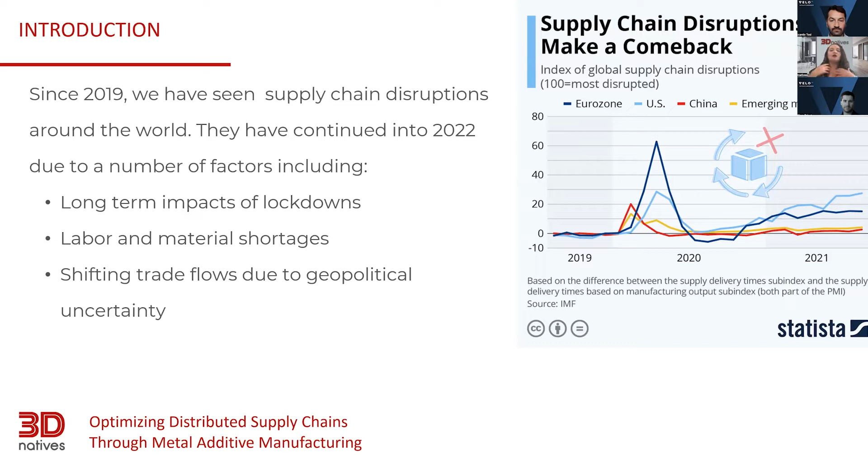Before we go into the detail, just a little bit around us. Velo3D, born out of the US about 8 years ago. We went public at the end of last year, and part of why myself and Ricky are here is expanding the knowledge base and our customer base into Europe. It is a metal AM solution, additive solution, and it's all around the focus around delivering complex, high-value metal parts without design or quality compromise.

As we say, we're a global company. On one side, we support customers directly, and on the other side, we have a large CM network to support our customers.

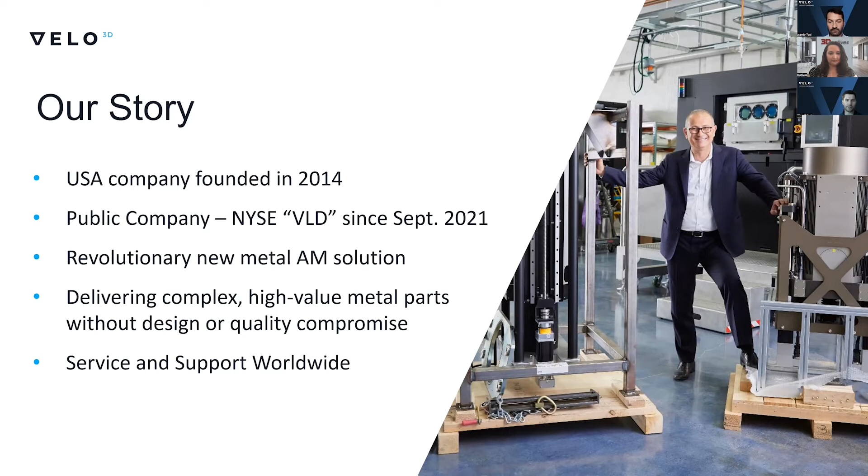In terms of who we serve and some interesting examples in supply chain, the first is a company called Launcher, one of our space companies, who had a quick necessity for lead time. They had a fast development process and needed large Ti 6.4 tanks. The whole reason they used additive was to reduce initial lead time, along with inherent technical capabilities we offer that you can't get with legacy techniques, like our support-free technology.

Within the energy market, we're seeing that the focus on castings and legacy castings is being monopolized. So big players in the energy industry are looking elsewhere for alternative manufacturing techniques to reduce lead time and ultimately dual source their supply chain, which is a very interesting conversation.

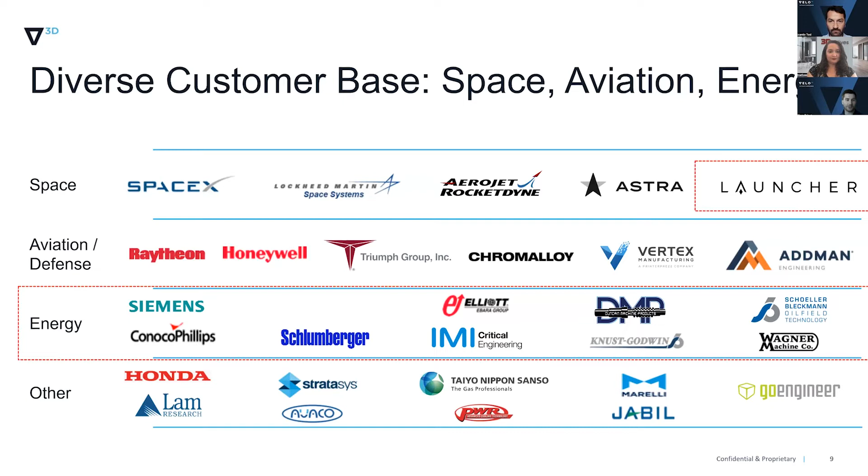In terms of what we do and examples where we've integrated into legacy supply chains, these are around parts optimized for controlled flow and heat transfer. Large parts like this Inconel 718 impeller, a typical oil and gas or energy part you might see made by legacy casting, can now be made with additive, with no tooling cost and no upfront minimum order quantity. You can make one off, ten off, a hundred off, as needed, reducing lead time and tooling cost, with almost a just-in-time manufacturing operation close to the site where you'd use this.

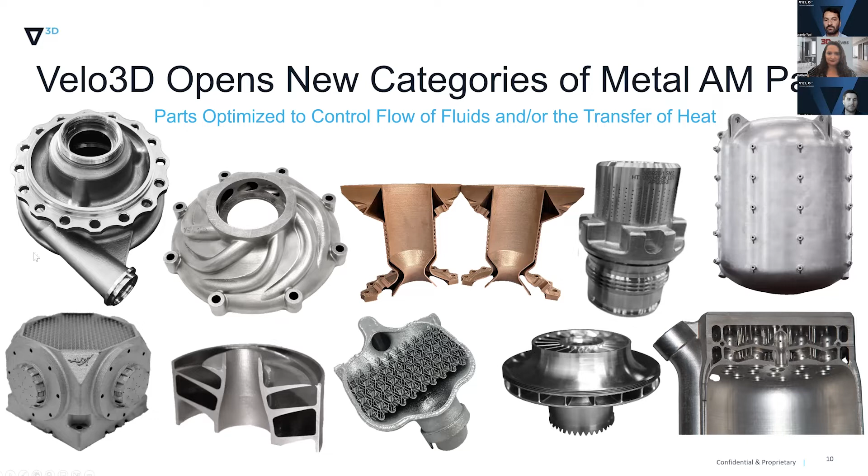Typically some oil and gas OEMs will want to build close to their oil and gas pipeline. We can talk a little later about some of these case studies, and I believe Ricardo will be going into a specific oil and gas case study.

The interesting thing about supply chains, especially legacy ones, is that things are qualified, industrialized, and standardized, and this is the way it's been done for a large number of years. This is a hurdle to overcome as we open up new additive supply chains. On one side you have industry level standardization, like NACE and MMPDS, which you need to understand and qualify. On the other side is manufacturer level standardization, which is something we offer as Velo3D.

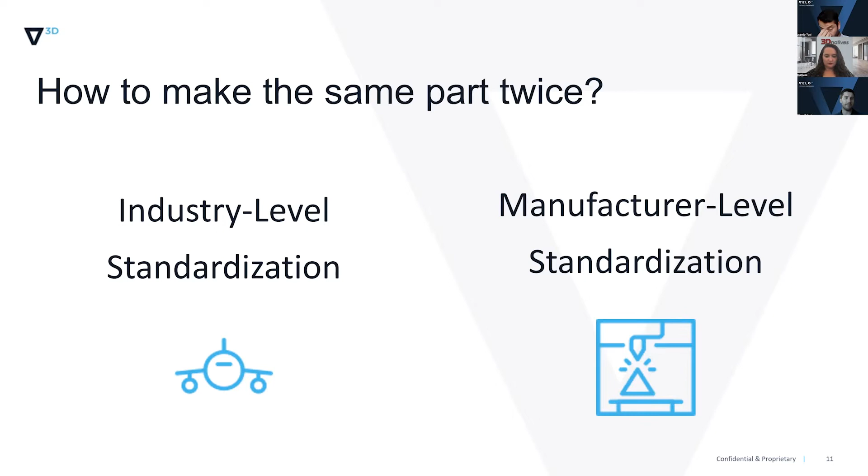It's really about understanding as a supply chain what you need to enter these supply chains, so it's about part quality, part qualification, and making sure we can deliver the right standards to these bodies. As we focus on fleet level standardization, with more of a global presence, it's around reducing the barrier for people to qualify parts and open up that new supply chain.

On one end you have an open source platform, where some OEMs give the end supplier or end user the right to change parameters to their needs. On the other end you have a lockdown system. Velo3D sits in the middle to allow flexibility for design, and this allows you to assign parameters at the front end of your additive process, reducing initial lead time and design time.

All of this allows for a flexible supply chain for either in-house or what we call contract manufacturer sourced manufacturing. The outcome is ultimately a standardized and validated material property set at the fleet level, which can be used to support your distribution of parts and supply.

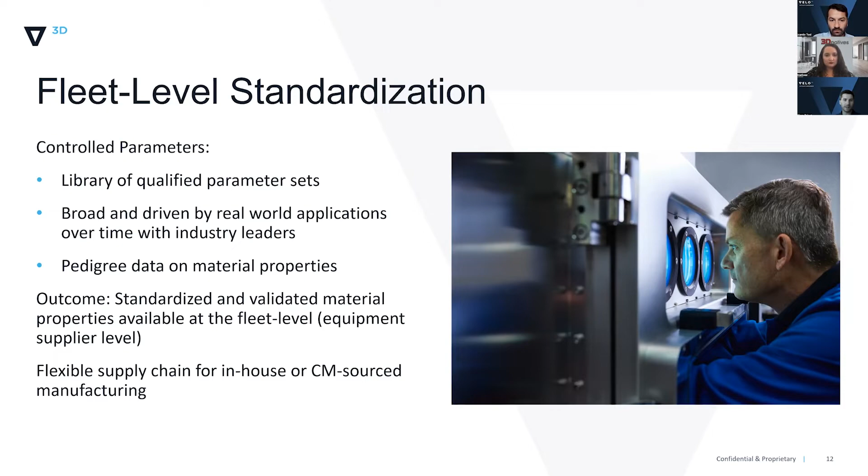We touched a little on it, but before Ricky goes through the various case studies, I'll explain what we do and how we integrate into supply chains. Ultimately we sit in the supply chain as a process and technology company. We offer the hardware, the front end flow software, and the Assure software. The focus is on standardization, design freedom, repeatability, and quality, so we can compete against robust supply chains and produce a global footprint that customers can produce parts on.

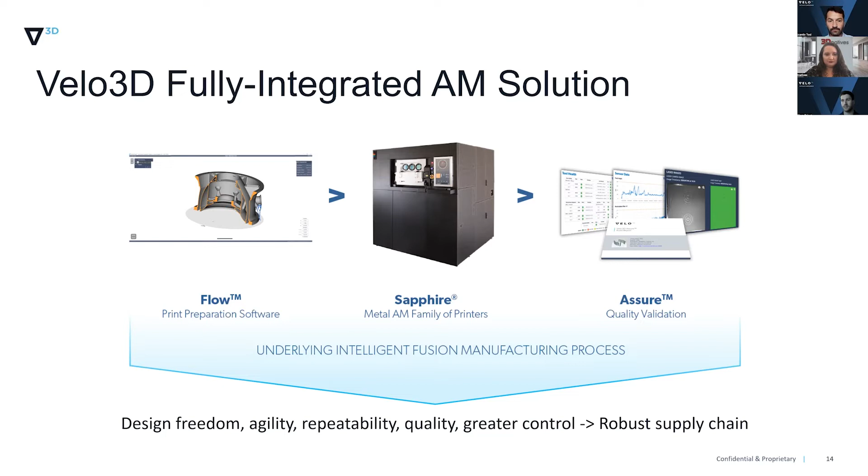On the front end is the print preparation software, which produces what we call a golden print file. For me, a robust supply chain starts here at the data level. This is what we're offering at the front end, effectively locking down the part for ultimate qualification as we move through the process before delivering to the customer.

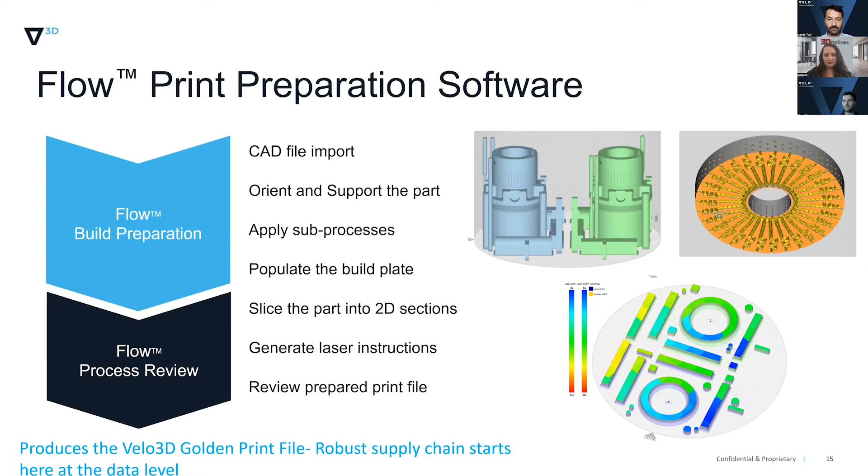It then goes on to the hardware level, and many of you might have already seen our family of printers. What's very interesting is that the hardware we've developed has been driven directly by the voice of the customer requirements from supply chain issues. Where customers need a very flexible supply chain, specific geometries, and specific validation of parameters, this is where we've developed our technology, and we will continue on that roadmap.

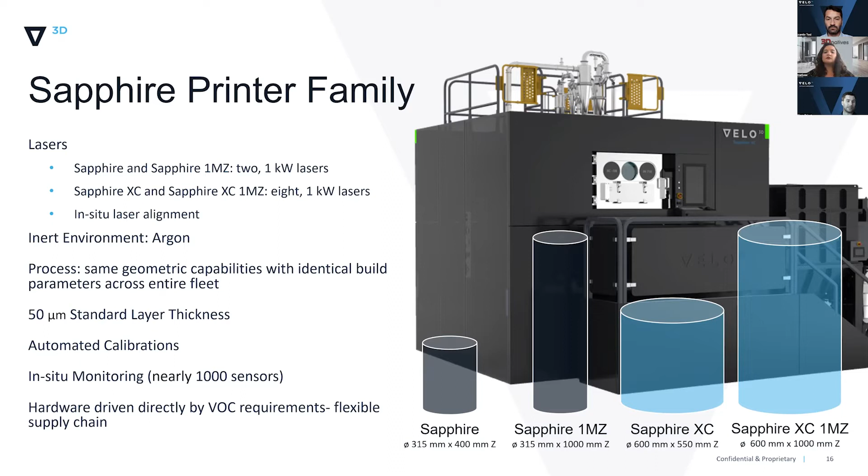Something which is a barrier to entry on many a new supply chain is the quality assurance and validation of a part. Essentially what we've done is ensure that we can meet that standard, or even produce a result which allows us to get over that barrier for validation. So effectively in-process monitoring, automatic build reporting, automatic calibration—something that against legacy systems you might see is even better for qualification, and ultimately gives the user who's trying to build a global supply chain that confidence moving forward.

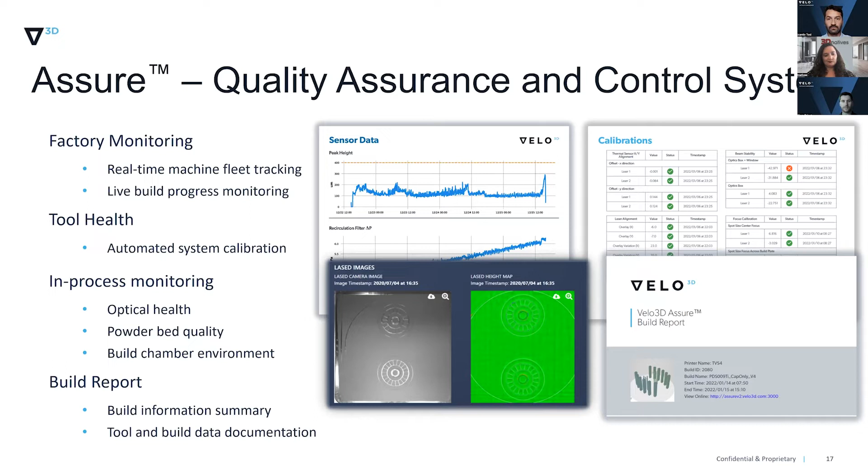What this culminates in is essentially a single source, standardized, robust supply chain option for OEMs. Ricky will talk about the golden print file a little later, but essentially this allows you to negate some of these supply chain challenges. You don't have to rely on legacy manufacturing techniques, and you can ultimately dual source globally. There's no reliance on tooling or legacy supply chains with long lead times—you can take those 50 weeks or 20 weeks down to a couple of weeks. So really, this is the benefit of the validated system.

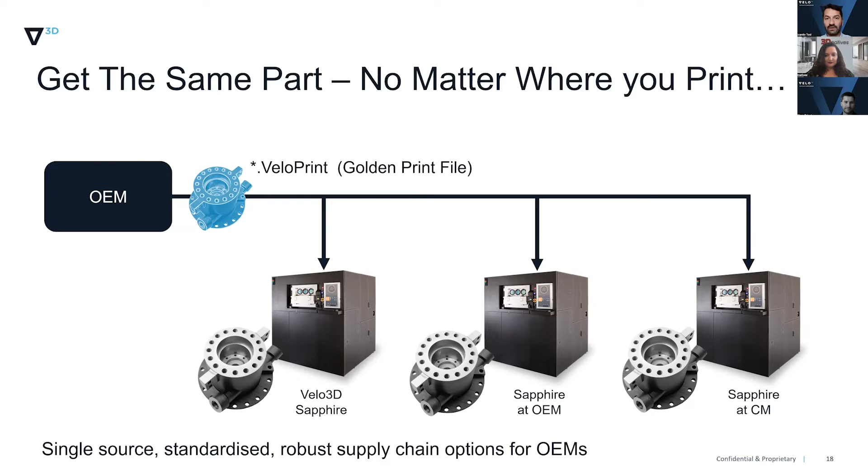Thank you, Will, and thank you Madeline for the introduction. So after getting through the main topic, I would like to dig a little bit more into the details, like the challenges that we currently have in the supply chain to qualify components, and how the market is currently addressing these issues. Will is driving the slides, so thank you, Will—I'll shout to you when it's needed.

Getting back to the topic, we have several challenges these days in the global supply chain around how to qualify parts and how to address manufacturing with additive manufacturing. At Velo3D, we're working with several manufacturers, contract manufacturers, and end users who are making parts, just to understand how we can improve the global supply chain and how we can manufacture parts through additive manufacturing. But it's not just about how to manufacture the part—it's how we make them consistent, how we certify the part, how we get the right certification, and address the right level of quality across the whole process chain.

Today we're covering an example of a valve—a drag valve specifically. I don't know if you're experienced with valves, but this is definitely a special one. We can see this cylinder, which is like a plunge valve in the middle, moving up and down. There's a flow going through it—it can be a liquid or a gas depending on the application. It covers different fields like fossil, nuclear, oil and gas. So by moving this plunge up and down, you can control the flow.

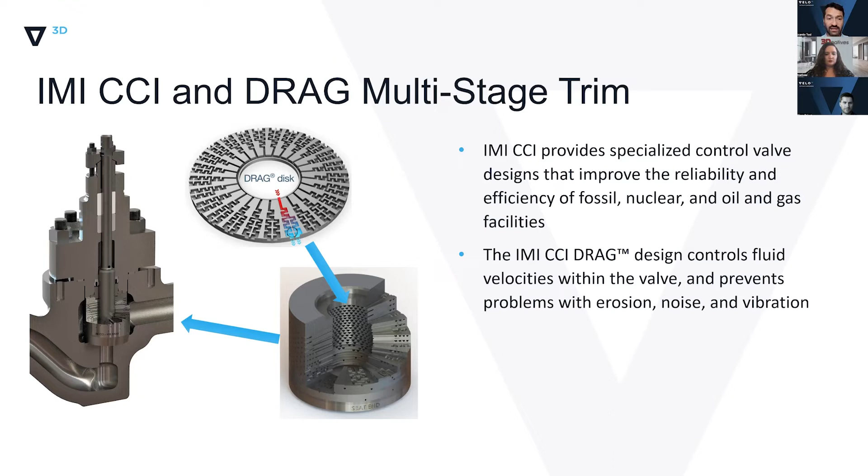If we go to the next slide, we see that this valve is conventionally made with discs assembled together, with some holes and different geometries placed just to make a pattern for these discs. When they get assembled and stuck together, they're conventionally brazed. So it's kind of a long process to make these valves. But on top of this, we can say that...

every valve has a different geometry depending on the application, so they can be very much customized. Most of the time we don't see the same valve twice, so there's a request for different designs. So here the matter is having a quick response to the customer and the design they have, and this can be called the big manufacturing challenge of parts, because we have different designs and different requests.

So it's very difficult to stay behind the request of the customer.

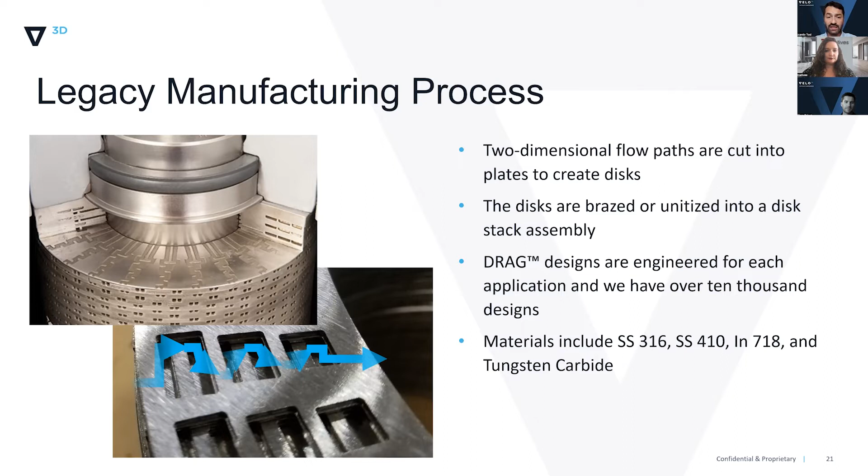You can really refine your channels in the way that you are willing to use the valve itself, and on top, you can really optimize the shape of the holes. So it's a very new approach, and this can be done in one single step, while also optimizing the weight and the design.

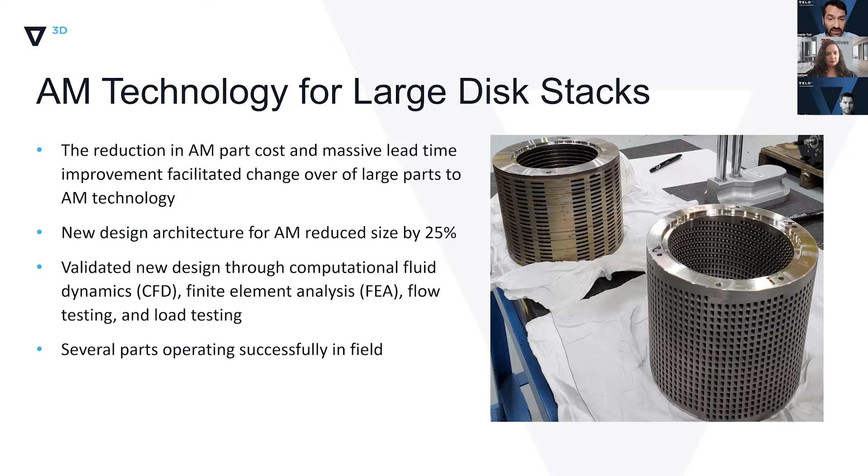If we go to the next slides, we can understand the way they're trying to manufacture, and especially to address the challenges to make this complex part in additive manufacturing.

As we are all aware, there are some certifications that need to be addressed to make the part usable during manufacturing. So there are some standards that can be driven in different fields.

For example, we can see aerospace. Aerospace has used the same material, or almost the same material, for the past few decades. So it's very challenging to bring new applications and new manufacturing strategies to the field.

What can you really do to address new metals, new parts in the supply chain using additive manufacturing? There are a lot of challenges.

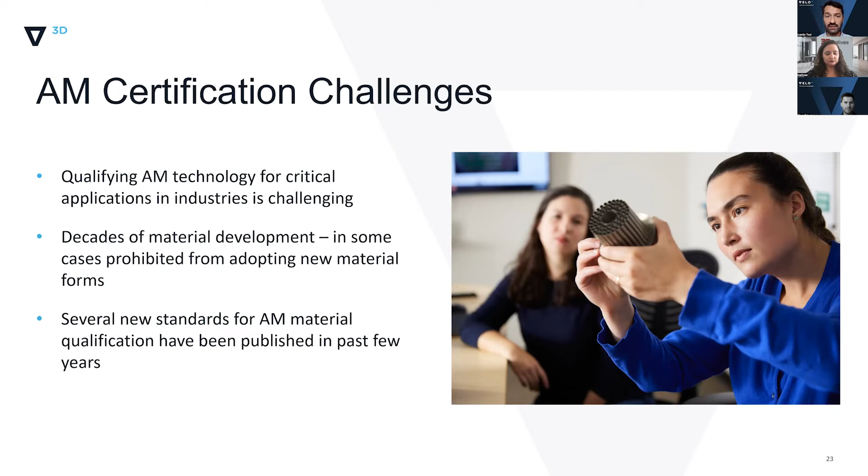So what we've done, we can see in the next slide, is what we tried to do with the IMI CCI to address these challenges.

So we followed a path to try to develop this new valve using additive manufacturing, but not just making it itself - trying to address and certify the component just to get it allowed to be mounted, to be in service and working.

If we go to the next slide, we see some fundamental steps that we follow during the qualification of the parts. There is a full integrated chain that needs to be addressed, and it's quite complicated because it's not just the part, not just the end user - it's all of them together, including the qualification you need to address to get the part suitable to be placed in the field.

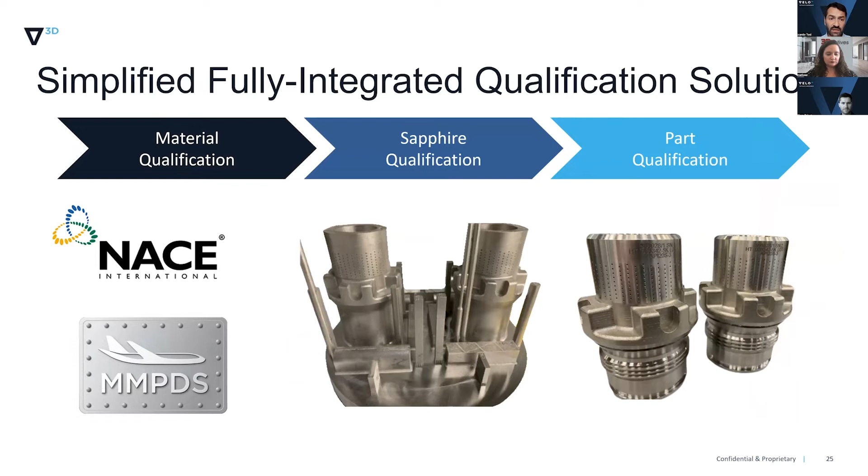So if we go to the first step, next slide, we can see that in this case it's oil and gas, where the part is going to get located.

There are a few certifications like NACE, which is about corrosion. There are some standards that have been placed in the past, but not all of them address additive manufacturing. So we still have a lot of gaps here, both in oil and gas and in other fields.

So what we've done in order to succeed in certifying these components - we did a lot of tests, mechanical tests, lots of prints, and a lot of post-processes that allow us to prove the quality of our component itself.

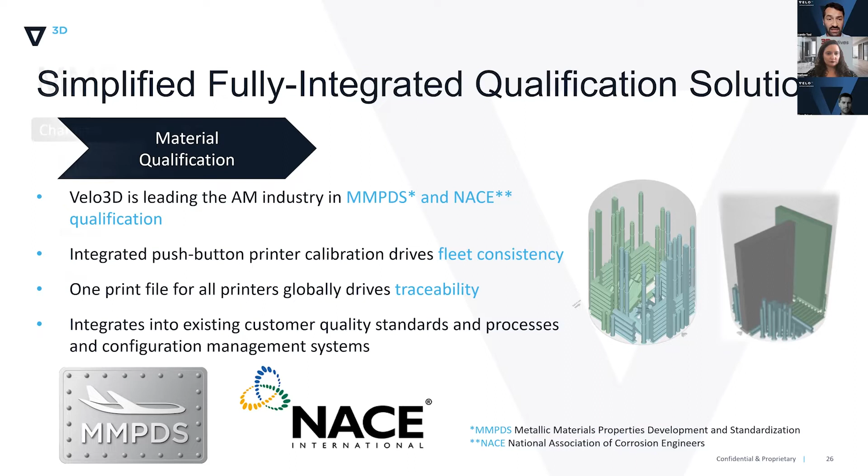If we see the next slide, we can also notice there's a various number of tests that we've done on our builds just to get the first data to really prove that the part itself can be good enough to be certified - from mechanical tests that happened before, to the characterization that happened afterwards.

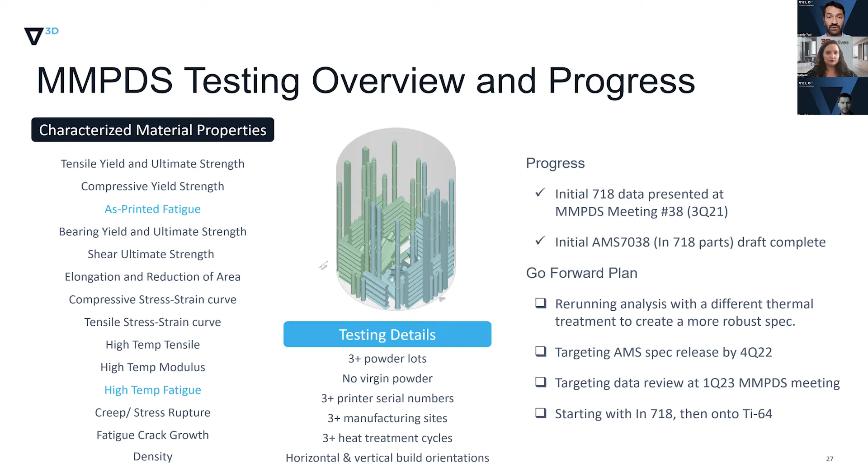So a lot of complex steps are introduced to really better understand what we are going to print during the manufacture of the part. So if we go to the next slide...

We can notice that after we get all the standards together to certify the quality of the material itself and align with the standards available in that field, we can then demonstrate how the system can be reliable.

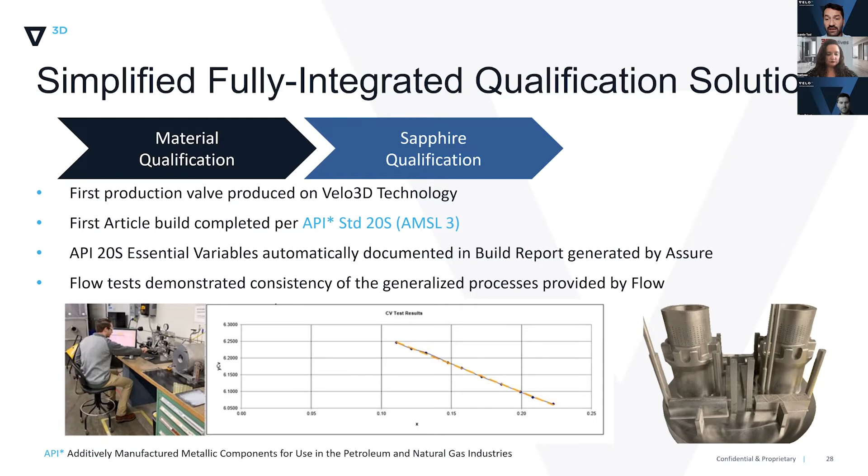This test was focused on trying to address some standards - this one is more like the API 20S that has been done in oil and gas, but there are other standards in other fields that can be used to certify components.

So after we check the system itself, there is the part qualification. The part qualification is the last stage that needs to be completed by all parties.

So by the machine itself, how the machine can be reliable during the time, it can print the same part, and how the part can be qualified itself. So our system all do a pre-setting, a pre-alignment, a pre-calibration that can guarantee that all the systems are calibrated at the same level all the time. And then the report is showing all the results of the part.

This gives you a preliminary report on the quality of the part, and afterwards there is the qualification of the part itself that can be done in the field. So the combination of the pre-qualification of the machine, the manufacture of the part with the report that shows you if there are issues printed on the part, and the quality of the part itself, and the test of the part that we can see in the next picture.

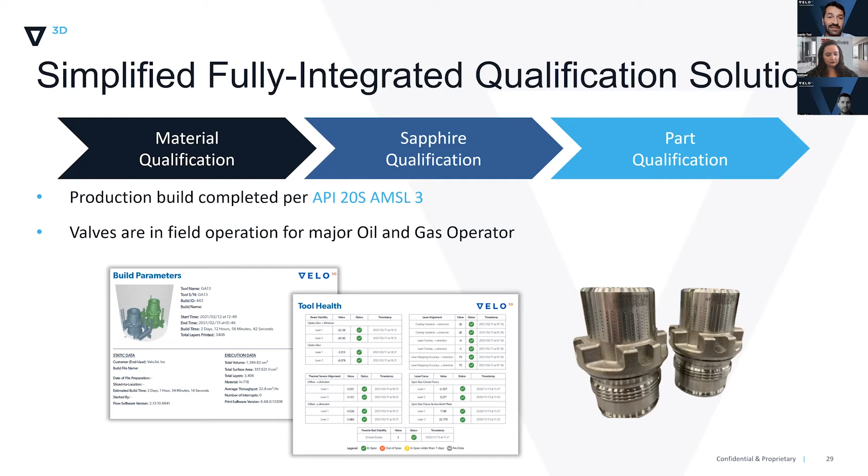We can see here that we actually perform live tests of the components. The component is mounted on a rig. A load test has been done here, so we can actually see that a proper test has been performed.

So all of this data pulled together can really certify your component for a distribution of parts in your manufacturing chain. It's very complicated to address all these items, so there is a big procedure to follow.

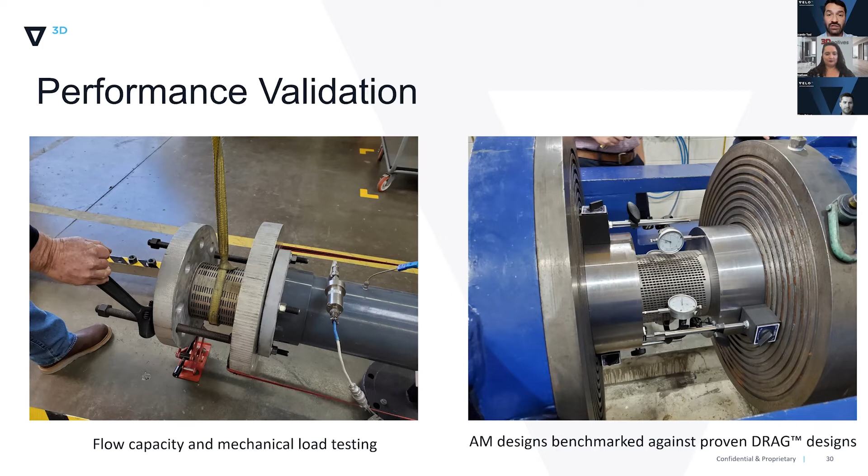This test was actually kind of successful. This part is actually mounted in wells with good results. We noticed an improvement in corrosion. These are real parts that have been manufactured. As we're working with them, we're working with others to try to get around all the standards to certify parts, to improve our global supply chain, and really give another option on how we can manufacture parts globally and even localized, just to get more flexibility in manufacturing and the supply chain.

The settings and the golden file generated in our system allow us to guarantee the execution, the printing of the same part, wherever you are globally, because all the settings, all the files in the machine will be the same. So no matter where you print, if you print in the US, in Italy, in the UK, in France, the outcome should be the same.

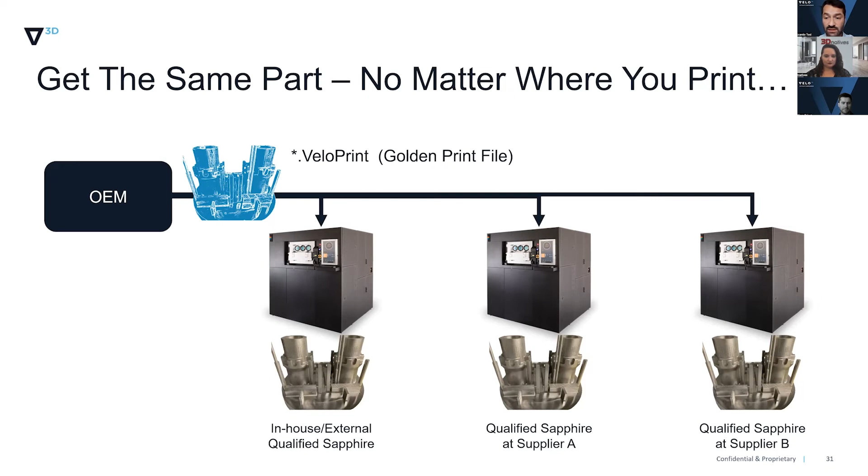We did some tests in the past that certify this as well, with excellent results. So if we see the next slide, with one part we can really explore several parts to get to the next level on how we can really certify parts globally together with the end user.

I know it's very challenging. I know there are a lot of steps to do certification that are still missing sometimes, and some demanding end customers would like to have a very high quality part. So we're working together with several companies these days to allow this improvement in the supply chain.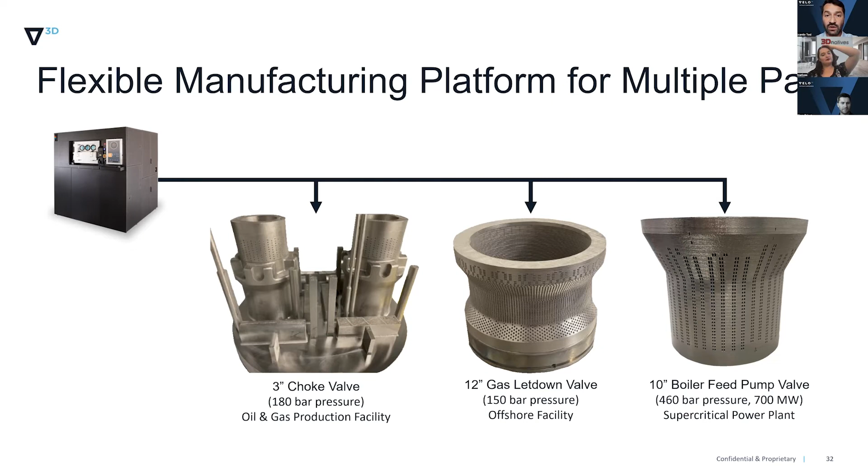I would like to highlight some benefits that you can get from the systems that can operate with our internal recipes, so you don't need very high experts running the systems. We have a full turnkey package with the flow print to prepare all the files and print the part by itself, and the software flow that can generate the pre-checks and the report of the part itself, just to certify and validate your prints.

This is a big advantage, I would say, in terms of manufacturing parts, getting standard components, and generating a production chain of parts that can guarantee the same quality every time.